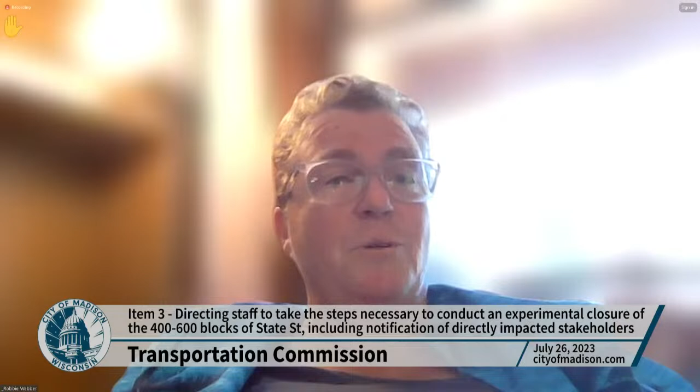We absolutely heard that when we had our conversations with GSBA representatives and the BID. Obviously different businesses have different perspectives, but one of the things we have to figure out is that balance between retail, service, entertainment businesses on the street, and the ability to get deliveries in. A lot of retail businesses are actually having deliveries go out for e-commerce.

If nobody else, I did have one question. One of the things I'd be interested in hearing about down the road is the concern expressed about how pedestrians, bicycles, skateboarders intermix in this pedestrian mall, and how would we ensure safety, particularly for those most vulnerable users, when people zoom by?

That is a great question, and it's one of the things we're really looking forward to digging into. One of the things in the back of my mind is the speed limit. That's certainly something. Bikes are also supposed to follow the posted speed limit, which is 15 right now, but we know certain cyclists exceed that on occasion.

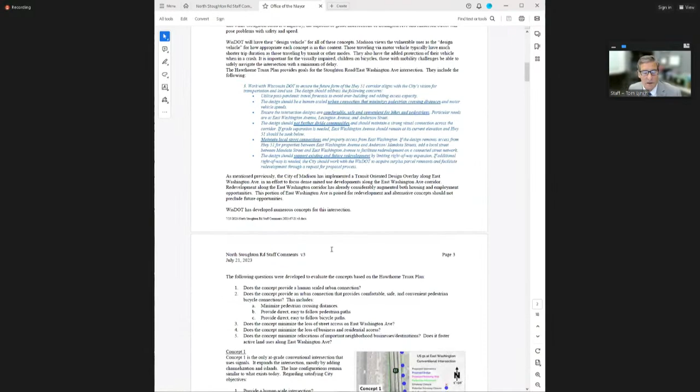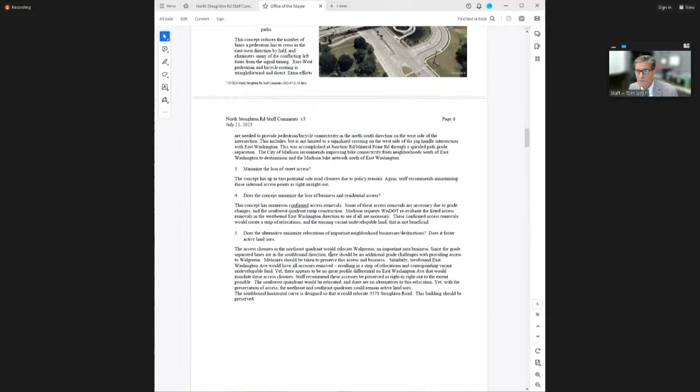So just to start, to know that it exists, I put this into Legistar. On Monday there were two updates that were relatively minor, didn't change the substance of it, but did change the wording of some of it. So you're welcome to pull this memo right off of Legistar -- this is the memo we will be transmitting to the DOT with your comments.

To discuss it, I put a lot of the graphics into a PowerPoint because visually it's easier, and that's what I'll talk from. North Stoughton Road study: Wisconsin DOT is preparing an environmental document, probably to be released spring or summer of 2024. This says the preferred alternative in the fall of 24, and that's not quite true.

I'm going to say that's screened alternatives in the fall of 23. It will go before the Transportation Projects Commission, that's a state commission for funding, in the fall of 24. They would like to narrow alternatives for meetings they're planning in September and October, and they're collecting comments.

For Madison, we have several key interests. We are interested in the intersections north of East Washington Avenue. The East Washington Avenue Stoughton Road intersection is of substantial concern to us. The Lexington commercial intersection also is key to us. For those not as familiar with the east side, that's the intersection that goes into the Walmart area. And then pedestrian bicycling.

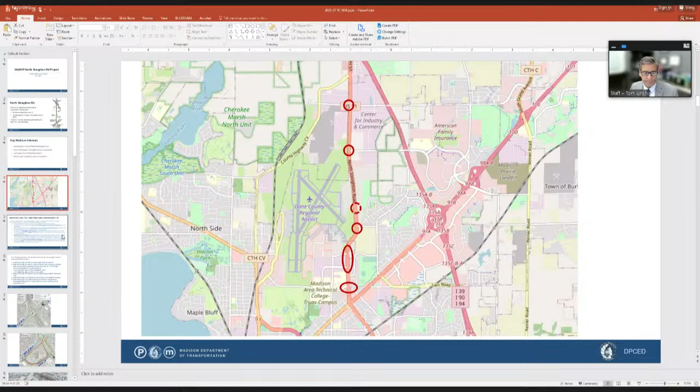Something perhaps bigger is the East Washington Stoughton Road intersection. So that intersection is right here. Recently, the Planning Division finished the Hawthorne Truax plan, and they have quite a few recommendations from that plan regarding this intersection. I highlighted a series of them.

The design should be a human-scaled urban connection that minimizes pedestrian crossing distances. The intersection should be comfortable, safe, and convenient for bikes and pedestrians. The design should not further divide communities. We'd like to maintain local street connections to the extent possible. And the design should support existing and future redevelopment. So those are key considerations.

I think East Washington Avenue is very important to us because the city of Madison just put in a transit-oriented development overlay. So on East Washington Avenue, we are asking for it to be more dense, more oriented towards walking and transit so we can provide more amenities along there. Our solution to transportation problems is to put our amenities and our people near transit where they can take buses. So it's really important that the urban character of East Washington remain.

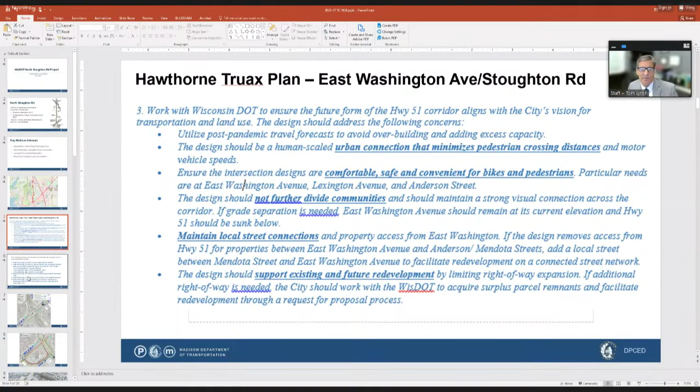We developed a series of screening questions, and this is in the memo. Does the concept provide a human-scaled urban connection? Does it provide comfortable, safe, and convenient pedestrian and bicycle connections? This includes minimizing crossing distances, providing direct, easy to follow pedestrian paths, and direct, easy to follow bicycle paths. Does the concept minimize the loss of street access on East Washington Avenue? Does it minimize the loss of business and residential access? And how does it affect businesses, both existing and future, through relocations or enhancements?

So I believe I just want to check, Alder Martinez Rutherford, this is not quite in your district, is it? Is this intersection in your district, or is it in Alder Field's district? I think Alder Field is on too, Tom. Oh really? Okay, yep, that'd be me on one side. Okay good, so this is good. I believe it's Alder Latimer Burris on the other, so we should try and get with her as well. But I'm glad that you're here, and I'm glad Alder Field is here.

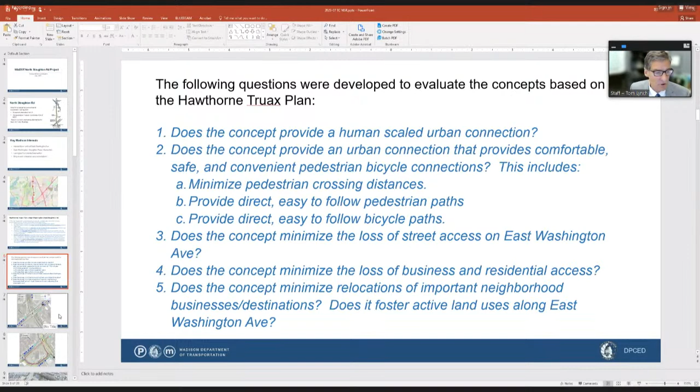So the first one is just a traditional signalized intersection. It looks like there's a lot of lanes here, but when you count it up, it's roughly about the same number of lanes on the approaches. Some approaches have one more lane, and some have one fewer lane. The islands could maybe be changed to reduce crossing distances, but this is an at-grade intersection.

This intersection actually becomes pretty feasible if, for instance, the DOT were to implement some of those I-94 interchange options at the 151 interchange. If you remember from our last meeting, several of the alternatives took a fair amount of traffic away from this intersection. If alternative 3, 4, or 5 were implemented, it would take quite a bit of traffic out of this intersection, and that at-grade intersection would be fully appropriate.

This is a very large intersection, but if you look at the bike routing, it's pretty traditional. Bikes would go straight east-west on bicycle connections. We probably would ask that an all ages and abilities type of facility could be provided. If you're trying to cross this as a pedestrian, they do have to use islands, but it's a little bit more straightforward.

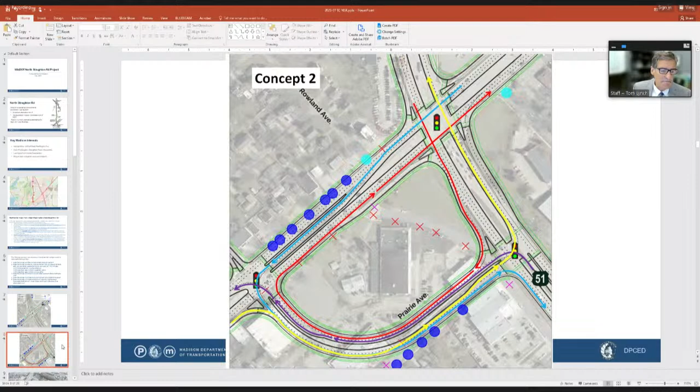This is an example of one, in North Carolina. Within my memo, I put a couple of links to locations so you could view examples of them. I think the links work in the Adobe Acrobat file. So that's something, but this is one. And here you can see, typically in a quadrant intersection, you can develop the interior. It's just that the left turns are relocated.

So those are the only two at-grade solutions being considered by the Wisconsin DOT. All the others involve some type of grade separation. So automatically, whenever you have a grade separation or a bridge, you're kind of changing the scale of the improvement. Something has to go up, driveways have to be removed. So it just changes the scale of it. It doesn't necessarily mean that's bad, but it just is what it is.

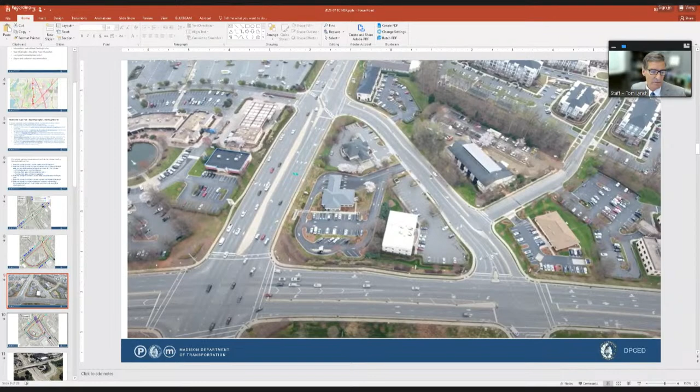Their third alternative is either called a partial jug handle or an echelon interchange. This is where, let's say, very much like the quadrant intersection, if I was going southbound and I wanted to go eastbound on East Washington, I would go southbound, take a right, and then take another right. Notice that in this particular intersection, I go over East Washington. We have one of these in the city.

It's over on Junction Road, and it's almost the exact same design. So here you can see what it looks like, and if you live on the west side or you care to drive to the west side, you can experience this. So at first glance, it does seem like it's a rather large improvement, and so that's probably why initially staff were a little bit cautious about this, thinking, do we want something this big?

But when you start looking at some of the criteria we're looking at, the east-west pedestrian movements, because the southbound traffic is grade separated, only have to cross 2 lanes right here rather than 7 or 8 lanes. Similarly, on this side, the east-west movements only have to cross 2 lanes and then another 2 lanes.

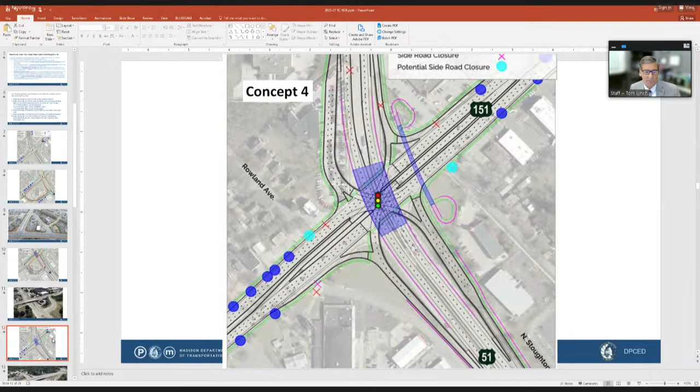The fourth concept they're considering is a single point interchange, partially because staff sometimes gave an indication that perhaps this would be better than a tight diamond. However, there are some concerns with this. We do have a single point interchange in Madison. Let me get it. It's right here.

It's very efficient for traffic. Instead of having two intersections, there's one intersection for motor vehicles. However, it's very difficult for pedestrians.

So I'll go to here. A pedestrian that's going east-west on East Washington has to cross a slip lane, cross another lane, cross another set of lanes, right? That's the good direction. In the harder direction, which typically is this right here, it almost always has to have a grade separated crossing, because there is always turning movements going on, and so there's never really a gap in the traffic where a pedestrian can cross.

So for the Verona Road single point interchange, they put in a tunnel. It's a rather long tunnel, but that's the only way a pedestrian that's over here can go here. They would not be able to do it here. There isn't a tunnel on the north side, and similarly on their proposal, they don't have a tunnel or an overpass on the west side.

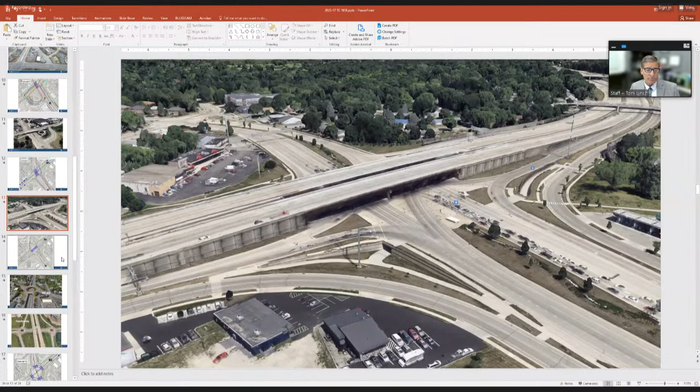So moving on, the DOT did get creative, for their part. They looked at a lot of different things. This is one, and you look at this and go, oh, well, isn't that interesting? That's kind of an interesting design.

The difference with this is that functionally, this is an example of one of these right here, except that instead of the roundabout being below, the roundabout is above. But this is an example of one. I think I put a link to this in the memo. However, functionally, this ends up being just a diamond interchange with roundabout terminals. It's just how do you want the roundabout terminals to work, but functionally it ends up being just like this. This is actually the Highway N interchange in Cottage Grove. That's essentially what's happening with this one.

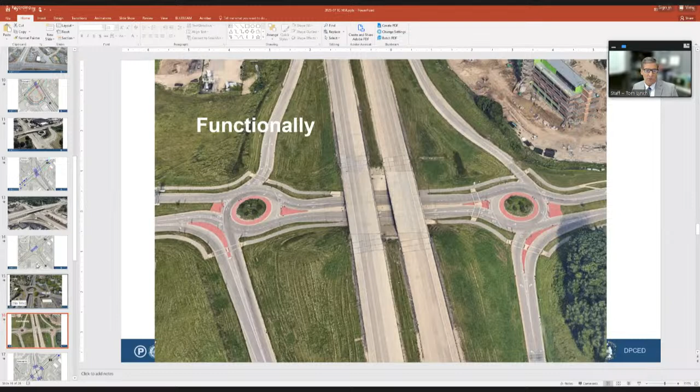The problem is that instead of the dominant direction being the north-south direction on Stoughton Road, the dominant or free-flowing direction is on East Washington, which is maybe not what we would want.

Because these are ramps right here, all of these driveways, you just can't have driveways on ramps. You just don't put driveways on freeway ramps. So these become relocations, but not only do they become relocations, these properties, we're not able to redevelop because they don't have access. If you don't have a driveway, you don't have access. So then this becomes a vacant piece of land on a street that we feel is pretty important for us as far as filling up with people and businesses and stuff.

One other factor is that all of the Stoughton Road traffic, which in this area seems to have 60,000 vehicles per day according to the site I was looking at, pedestrians would have to cross.

Right now, pedestrians have to cross that 60,000 vehicles per day, but they have a signal that helps them cross. It's not comfortable, but they have a signal. With a roundabout, they'd have to find gaps, and that would be difficult in the east-west direction. It's easy to find gaps in the north-south direction because it's just turning movements, but the east-west direction is where a pedestrian would have to cross, and that's 60,000 vehicles. So that's a lot, and we're not really recommending this one.

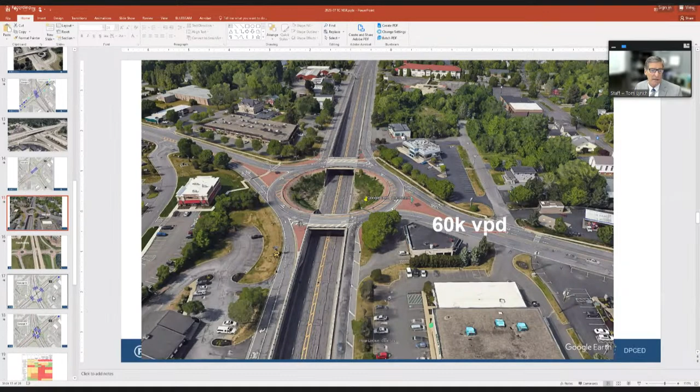But that being said, the DOT came up with some creative designs, and they're worth looking at. If we look, concepts 6 and concept 7 are essentially the same, they're just treating things differently. So I think I'll describe concept 7 first, and then go back to concept 6.

We could not find links to concept 6 or 7 because we could not find other examples in the United States where this exists. What this does is it takes turning movements off both the north-southbound and east-westbound streets and brings them up to a couplet. These are little signals, and they'd be snappy signals, like 40-second cycles. You come up, get a green, make your turning movement. I'd take this ramp, get a green, take my turning movement, go that way. Similarly, come up, get a green, take my left. So this would be very snappy.

For pedestrians, it would actually be kind of good. These are just traditional intersections for a pedestrian. They would actually have to cross probably only a quarter or less of the traffic volume, because they're only crossing turning movement volume, not the through movement volume. So it's really kind of innovative.

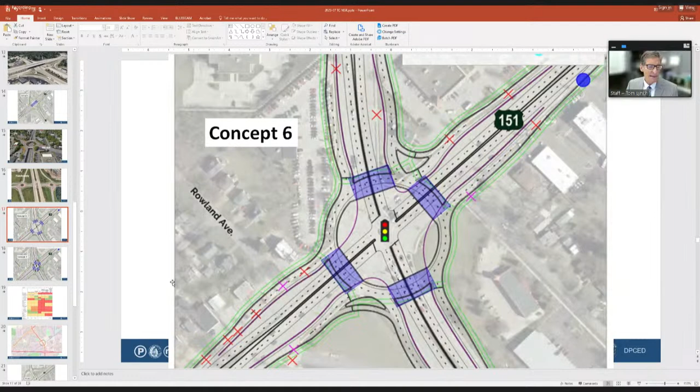So on that, our staff memo recommends maybe moving forward with concepts 1, 2, and 3. If you look at the way we scored them, these may be a little bit subjective. Concept 7 is kind of an intriguing concept, but it's non-traditional, and I don't know if we could find another example. So I'm actually, if you don't mind, I wouldn't mind pausing.

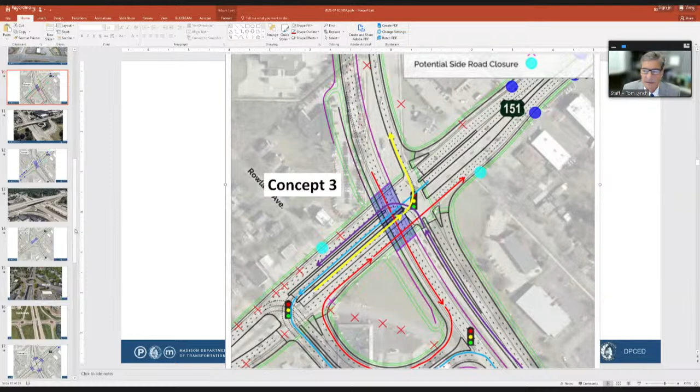Thank you so much. So I wanted to echo some of the concepts, values mentioned by the last 2 speakers, and thank Tom for putting together this chart comparison of some of the alternatives per these goals of the city. I agree with the majority of these. None of the alternatives look quite perfect. I was at the local elected officials meeting where these were previewed a couple of weeks ago, and my biggest piece of feedback globally for each of these was that we do need to prioritize pedestrian crossings in this area to avoid further disconnecting some of these neighborhoods from each other. So some of the grade separated intersections or interchanges are the ones that I'm very much least interested in seeing happen.

And so there are 2 kind of uses or types of crossings that I want to talk about that I'm most interested in making sure we're not requiring people to go up uncomfortable spiral ramps over the highway. So my constituents are the Mayfair Park neighborhood, which is in the southeast quadrant of this intersection, who will soon benefit from a major city investment in the northeast quadrant of this intersection, the Reindahl Park Imagination Center. So they'll be crossing quite a bit there to get over to the new library and culture center and the parks facility that's going to go up at that site. And they're very excited about it, the neighborhood's been looking forward to it for a few years, and their ability to get there will be contingent on how readily pedestrians and bikes can cross East Washington at this location.

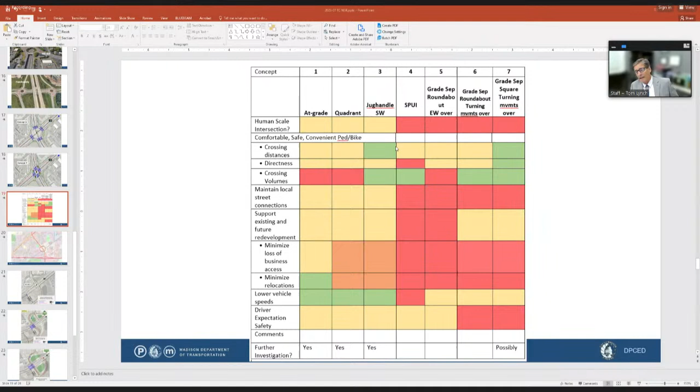We're seeing on the north side, both the northwest and northeast quadrants have land uses, and people need to be able to get between the northeast and northwest quadrants now. There were comments since the Ped Bike workshop on how that could be facilitated, because there is housing in the northwest quadrant, and they do need...

Walgreens, that serves a function. People need to get to that, right? Klein's just made a huge investment in their facility. It's kind of an east side destination, right?

It's okay for people to be able to get to where they need to get, without having to cross 8 lanes. So I did try in the memo to state that our design vehicle was a vulnerable user, not the WB62, right? But it's more the...

Would you feel comfortable having your 10-year-old or 11-year-old on a bike go to Walgreens? And if you don't feel comfortable, then we're not comfortable with that alternative. Yeah, for sure. Alder Martinez Rutherford, go ahead.

Yeah, I just wanted to mention that, knowing this area pretty well since I drive through there all the time, both northeast and northwest have a concentration of lower income people, and I want to make sure that they're served in the best way possible and not further impacted by what happens here.

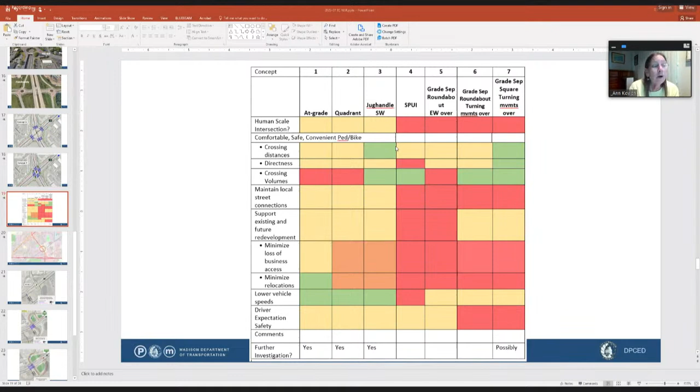Great. Thank you. Okay. I know we have more to go on this item. Anybody have anything else on East Washington before Tom moves on? Okay, great discussion. Go ahead, Tom.

Yeah, I'm going to be quicker on this. I think it's a little bit more straightforward. This is interesting. This is an intersection right now that was at one point a grade separation, and now they're looking at making an intersection. This is Lexington and Commercial, and this is the Walmart.

There's some city buildings back here as well as a neighborhood. In fact, I lived back here when I first came to Madison.

Things of concern or interest here is that this is the line that if we were to get passenger rail service, this would be the line where we get it. Then also, the bicycle and pedestrian connections here are very poor, and yet Walmart is a destination for lots of different types of people, right?

This is where people get their stuff. In fact, if you drive by Walmart or ride by it, the bus stops always have someone at the bus stop, almost always. It just always does.

One other thing that has been mentioned is that here's an area of housing right here that doesn't really have access to Walmart, right? On the east side of Stoughton Road, there's not a north-south connectivity for pedestrians or cyclists. You have to get it pretty much in a car. On the west side, there is, with that frontage service road, but on the east side, there's not.

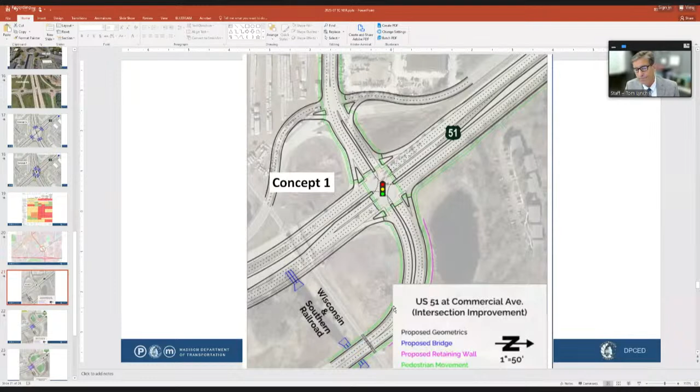Concept two has a jug handle. The way it works is it has right-in, right-out on Stoughton Road. So let's say if I'm traveling south on Stoughton Road and I want to go to Walmart, I just take a right turn off, go around underneath Stoughton Road.

And then I'm on the street that gets me to Walmart. So this seems indirect, but we do it already kind of now in the city. Like if you think about the Verona Road interchange, they have a Verona Road frontage road to get to Home Depot, and then the tool shop, Harbor Freight. So this is a typical type of jug handle.

This does not have any signals on Stoughton Road. This does make it better for a cyclist or pedestrian crossing Stoughton Road. All of a sudden they're just on this little local road, right? They don't have to cross 8 lanes of traffic on Stoughton Road like they currently do.

They're more on a crossing that would be comparable maybe to the way Cottage Grove Road crosses Stoughton Road. If you've ever been on a bike on Cottage Grove Road, the way it crosses Stoughton Road, this is how that would feel.

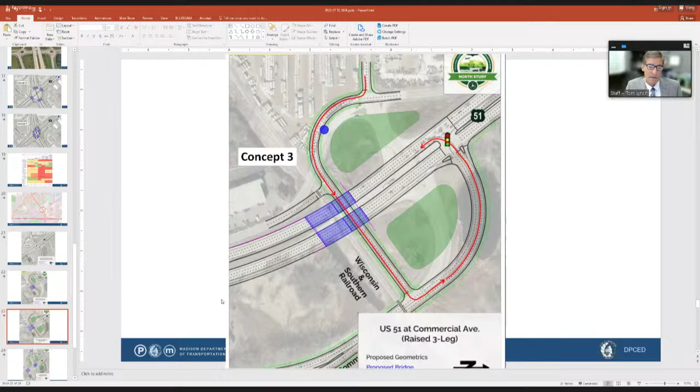We're more hesitant about concept 4. Concept 4 is a full partial cloverleaf interchange. We think the interchange and kind of the free-flowing nature of the ramps will lead to probably higher speeds.

And then those higher speeds, they'll get to be higher speeds up until a signal that's just right here. The signal is relatively close, I think it's a third of a mile. So you get on a freeway interchange just to have to stop this way. Similarly, let's say if I'm at Walmart and I want to go to East Washington, I get on this freeway interchange just to come to a stoplight, at Stoughton Road or at East Washington.

We have a similar situation with the interchange at Aberg. We have an intersection directly north of Aberg, and cars are flying up that interchange ramp, but then we have a school crossing right there at the end of the interchange ramp. It's very difficult for us to keep speeds in the appropriate range. We do have an RRFB there. It's a school crossing. It's not good.

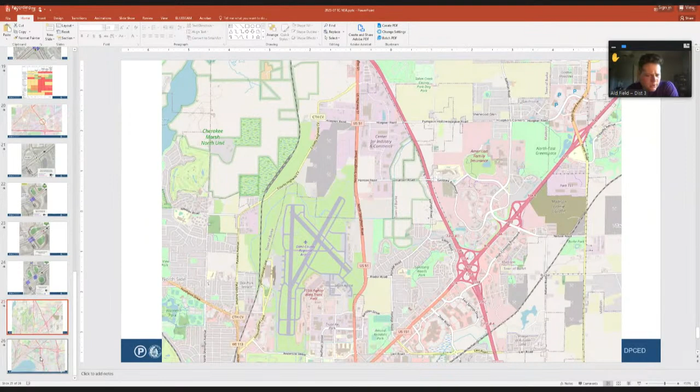Alder Field, go ahead. Thank you very much, I'll be brief. In this area, folks in the Mayfair neighborhood and further east are also pretty interested in being able to cross Stoughton Road here. So whatever configuration of Lexington ends up being chosen, we'd really like to see the ability or enhanced ability for pedestrian and bike crossing toward downtown. Thank you.

Okay, other comments or questions? Had a lot of great feedback on this tonight. Bill, go ahead. Thanks, Sam.

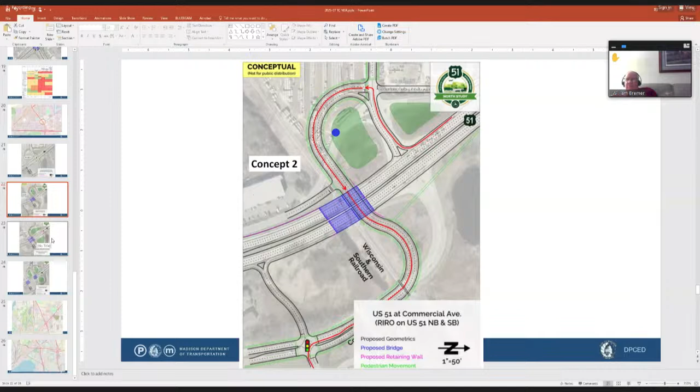Yeah, that's 4. Yeah, I don't like that one, it looks just out of place.

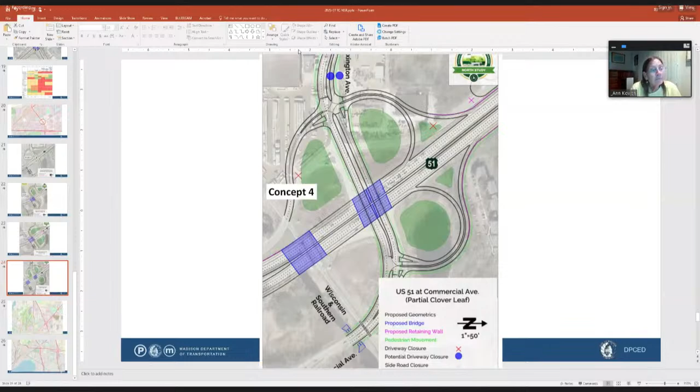Other comments or questions for Tom? Okay, you have what you need then, Tom? Yeah, I do. And first, I've taken up a lot of airspace — we devoted an hour of this meeting or more to this, but I think these are very important.

WisDOT's moving quickly on these 2 studies, I think it's really important for us, so I thank you for your time. I think we have to be proactive in our engagement with WisDOT, and this helps us to do that. Thank you. Denise, I know you had to join us late because you had another commitment — did you have any other comments before we move off of Stoughton Road?

I really feel like Chris spoke to my always overarching concern around building for all users. I am curious about what WisDOT's engagement plan is going to look like. I serve on a couple of WisDOT things, like the current active transportation 2050 plan, and have been pleased with the increase in WisDOT engagement to diverse communities. So I just want to put a strong plug in here that anything WisDOT is doing that we can support and encourage, making sure the voices of folks who are often not included in these things — especially as it gets away from the city and into the state — I think extra effort is going to need to go into outreach, and I really want to encourage that to happen.

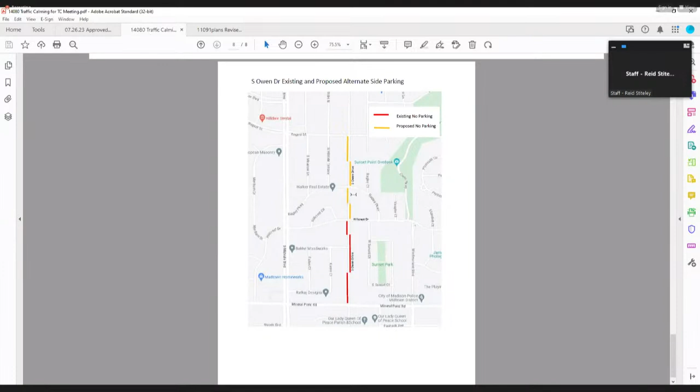So with that general input, engineering did some speed studies in the area and looked at what the traffic was doing, and we also did the survey and garnered general interest from the project area. I have those results here tonight. From the speed study data - just before I get into that, so everyone's on the same page, here's a little map of where we're at. The project will be the reconstruction project between Hillcrest Drive here on South Owen Drive up to Regent Street. With this project, we're looking to install the traffic calming devices on the second block, which would be the block between Bagley and Regent Street.

The responses from the residential reconstruction survey - originally we had sent out mailers to the area. Of the 37 mailers, we got 16 responses back, so just under 50% response rate, which we think was pretty good. There were multiple questions on the survey, but in relation to the traffic calming devices, question 9 asked if they wanted it, and question 10 asked what type.

The majority of applicants who responded said yes, they were interested in having traffic calming. The majority of the other responses favored some combination of traffic calming, speed humps and traffic median circles, with slightly more people favoring only the traffic median circle, and then speed humps.

In 2015, there was the reconstruction of Hillcrest Drive. Let me bring up my map here for everyone. Just south of the upcoming project limits was this reconstruction of Hillcrest. In that project, they installed a traffic median circle. Actually, you can see it right here.

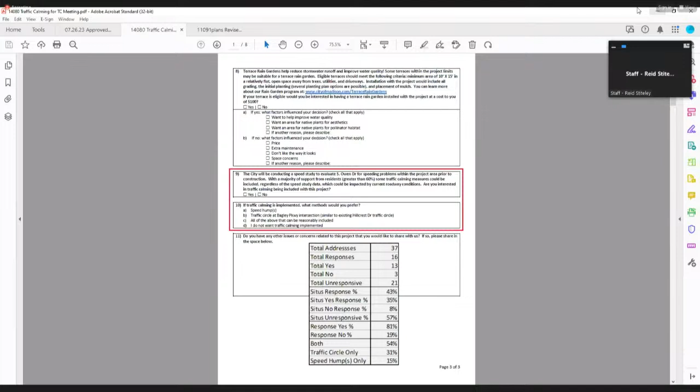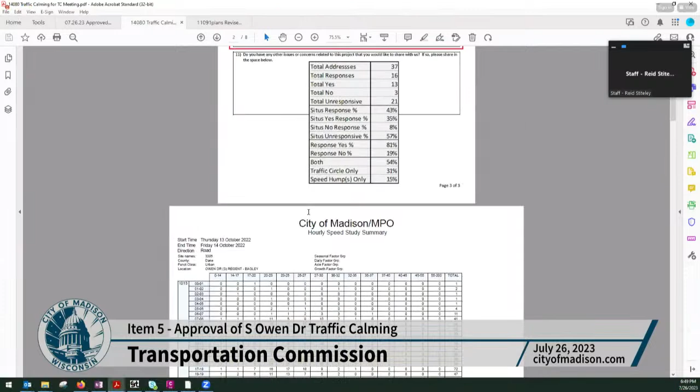I'm not seeing it. Is anybody seeing it? Can you see it now? We're still seeing the survey. Okay, let's see here. I think it said it's paused. One second, it hasn't moved. I'm gonna try one more time. Reid, this is Andy, you might be sharing the individual item and not the screen. Share the desktop instead of the application. Screen 2, let's see if this works better. How about now, can you see a moving screen? It is moving now, yes. Okay, my apologies about that.

So I guess this was the survey that we sent out, or one of the pages from the survey that had the questions on it. The area that we're looking at here is between Hillcrest Drive and Regent Street on South Owen Drive. Yeah, we did see that.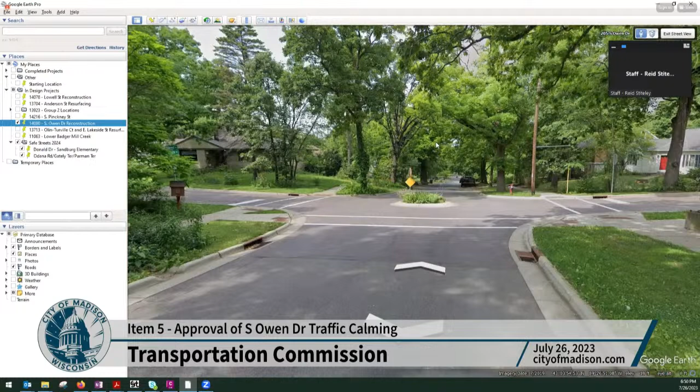In 2015, Hillcrest Drive was reconstructed to install this median island in the street at the intersection. That's kind of what we're proposing to mimic with the next intersection up, at Owen and Bagley. So just some context there of what's already there and what's working right now.

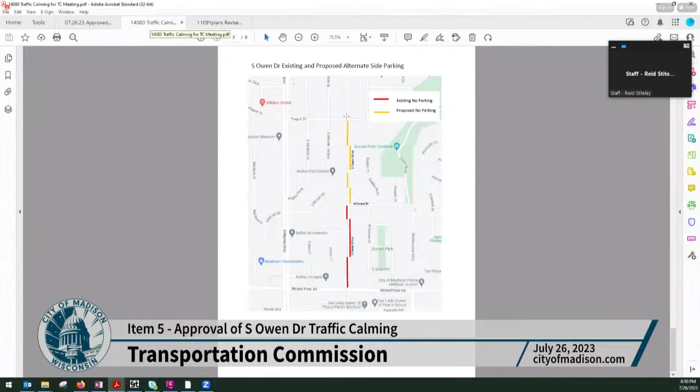In addition to that, we did some traffic studies for the area. The first study, or for both studies, one was done in October 2022, one was done more recently in July 2023. The results didn't really show a high level of speeding in the area. The 85th percentile speed was in the 25 to 27 miles per hour range. There was, I believe, between 5 to 7% of vehicles observed between these studies that were seen going above 30 miles per hour.

So there's kind of a conflict between what the studies are showing for the data and what the community is asking for with traffic calming measures. That being said, because we are reconstructing, it's the best time now, since we'll be more or less obliterating the street and rebuilding everything, to be able to do it now and get these installed.

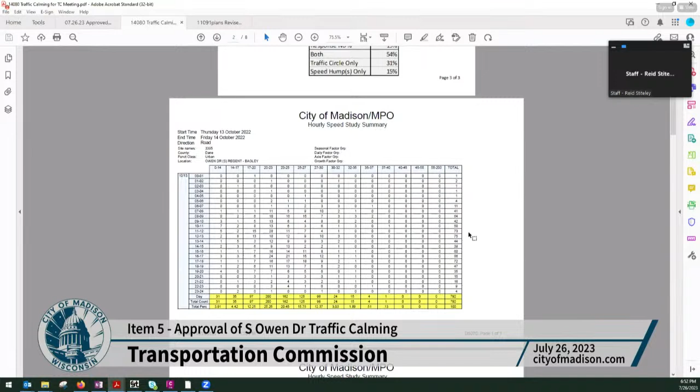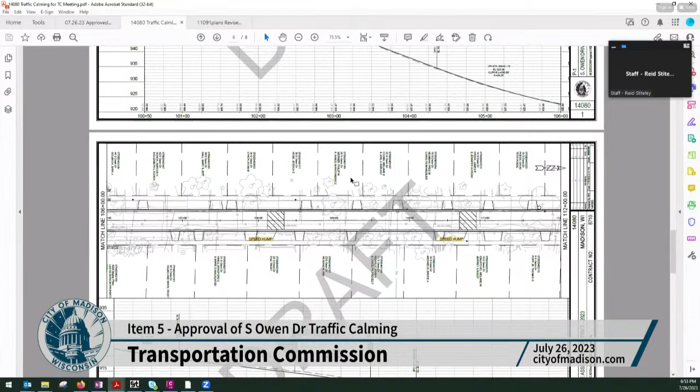With the outreach and response from the community that we had, we're still going forward with pursuing the addition of the speed humps and the circle for the area. I have them shown on the plan, some draft plan sheets here. The first segment of Owen between Hillcrest and Bagley is generally too steep for these installations. Typically we want the profile of the road to be less than 7%. This is a pretty steep section of Owen, it's around 9.5%.

So that's where we're left with placing the speed humps, on the section between Bagley and Regent. We generally have more gradual grades here, and the two that are proposed are offset by approximately 250 feet from the intersection to maintain slowed speeds as folks travel between the intersections of Regent and Bagley.

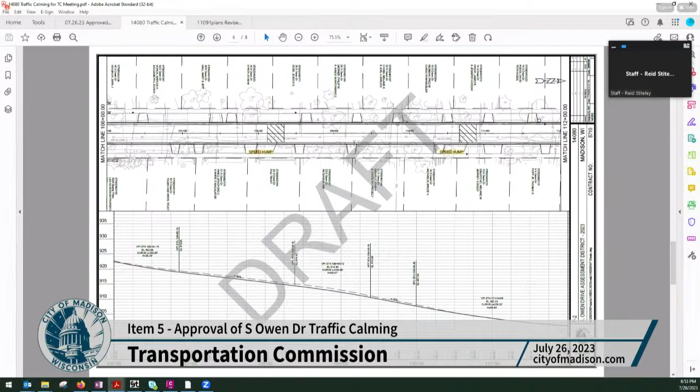The traffic circle is shown on this page. It's almost an exact copy of what we did recently at Hillcrest. It would not be a grass center though, it would just be a mountable terrace for turning movements for the area.

So that's pretty much what we're proposing with the project as far as traffic calming goes. One other thing to note, it's not shown on these pages, but we are going to be installing, with the reconstruction project, redoing the storm and sanitary. So the storm sewer inlets would be located on the high sides of the speed humps on both sides, to mitigate any ice damming and drainage issues from water collecting on that side. There will be drainage inlets installed with the project along the street for that surface water runoff. Okay, thanks Reid, comments or questions for Reid?

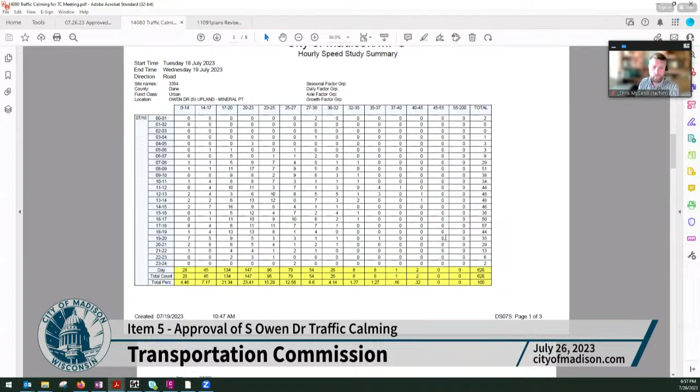Yep, perfect. But the speeds may increase with the better road - that was your other point, right, Tom? Right. We've always thought, if it's a really rough road - the pavement rating here is a 3, so it's in pretty bad shape - and then there's that hill, so we'd expect to probably get more complaints of speeding after the fact. So that's why we just include it with the project.

Okay, thanks, Tom. Reid, did you have any other comments before we move on? Thanks, Sam. Nope, that's great. Sorry for kind of rushing through that. The project will add curb and gutter to the streets.

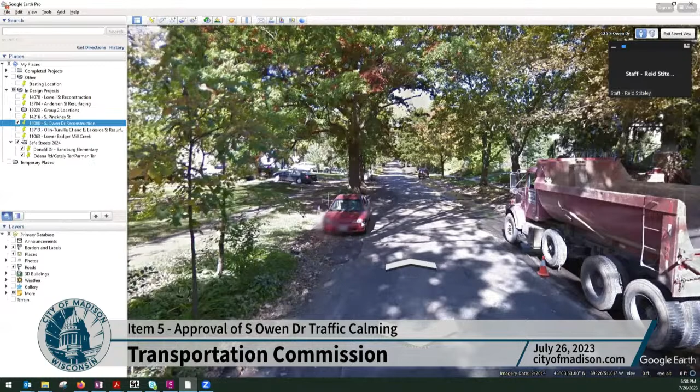With the existing street, you can see here the street width - there's a lot of folks that park on the existing terrace, and that won't be able to happen now with the reconstructed streets since we'll be adding curb and gutter. We're proposing staggered parking, alternate side parking, to match what was done on the previous section of South Owen Drive too. That's also part of the traffic mitigation and traffic calming strategy for the area, and to allow parking - so there will be parking too on the street. I just wanted to clarify that for folks.

Okay, thanks. Let's see, looks like people had hands popping up and down. We'll go with Darren.

Thanks, Anne. I was just trying to look at the section on my little screen. So just to clarify, because I think I can see them - are there sidewalks on this road? Yes, there are existing sidewalks, on both sides of South Owen Drive.

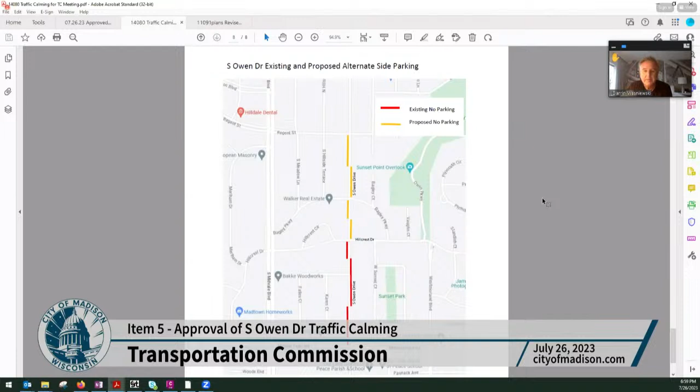And just had a question about the speed bumps, understanding that one section isn't really feasible to put it in because of the grade - would there really be anything, in your opinion, recognized or realized by just adding the speed humps to the second part of that street, as opposed to just on-street parking and then the circle in the intersection?

I would say there will definitely be an impact from the speed humps. Typically, from what I've seen, they can help maintain at least consistent speed, especially when they're spaced in the 250 to 500 foot intervals, so folks can't really speed up between them. They'll help maintain those slower, consistent speeds and prevent folks from ramping up in that area.

That being said, it's just like that section between Hillcrest and Regent Street, which is approximately 800 feet long. So like Tom said, it's kind of right in that gray area. We've heard from folks that they want them, and our speed study is only for 24 hours each. So it's kind of in that area, but in general, I think they would still provide some traffic calming benefit in that they can help dissuade speeding in that area, just because they'll be hitting those humps.

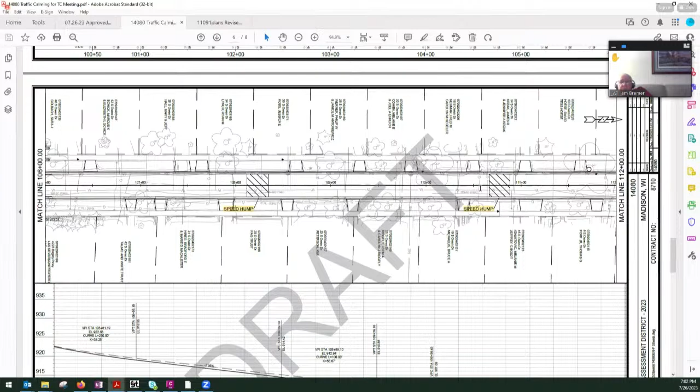One of the things I think, the plus of putting in the speed humps, is you get to do the drainage and do it correctly without having to worry. You can put the inlets where they should be if you're going to have speed humps. Many times when we put in speed humps, we don't have that luxury because we can't change the storm system, it's just too expensive. But in this particular case, I suspect that might be one of the reasons for the need of the project. So I think it's an opportunity to take advantage of that, put the inlets at the most desirable location for the traffic calming measures. And I really like the circle too.

Thanks. Thanks, Bill. Alder Figueroa Cole, go ahead. Thank you, my hand kept on going down. Yeah, I don't know why.

So yeah, I had exactly the same question as Chris had, like which program this was. So thank you for the feedback on that regard. I had to just put my two cents in here.

I mean, as much as I support this program, and you guys know I'm your number one cheerleader, things like this make my job very difficult. Everybody wants speed bumps in the city. Everybody. And the only way I can say no is that we have a process on the city for safe streets. We have to put the name on the list. We need to get evaluated for traffic. We're using data, I have this speech down on what this policy is. And sometimes I get Renee involved, and she again turns all that down and refocuses people on the policy. But then here we are in contradiction to the policy. This doesn't even make it to the top of the list for sidewalks. So it makes it very hard for me to say no to other people when they want theirs.

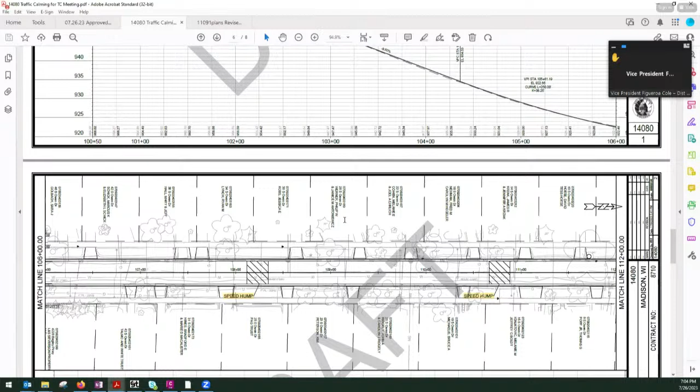So I understand the prediction that in the future these might be beneficial, but I really hope that the commission, along with their approval, has a good justification as to why we are expending money on one of the most expensive traffic calming methods, the speed bumps, so we can then justify that in future requests. That's how I feel about it. Like I'm here thinking.

So I really appreciate if this is approved, that there's something we can point back to in the future to justify this not following the rules we're using for the street calming policy that we put in place. And it cannot just be, oh, this is not done under that program, this is done under this other program. We're solving the same issue. So I will appreciate clarity on why we will do this here and not in other places.

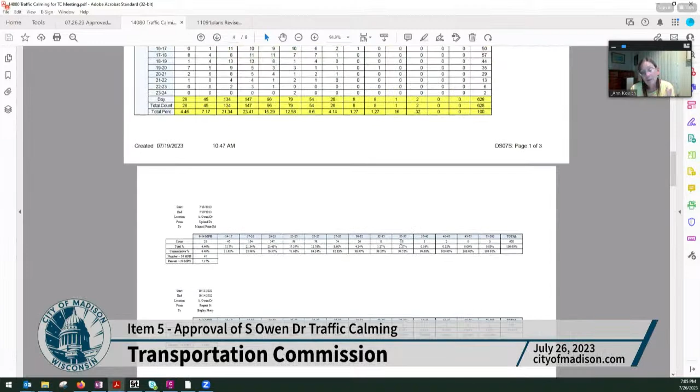Yeah, thank you, and that's a great question. I'm going to ask Tom Lynch and Tom Mohr to comment, because there are different programs. And Renee, if you want to hop in as well. When we have new streets going in, we've put in traffic calming along with those new streets because it may be paid for by the developer, as part of a new construction program, or where we have street reconstruction or street resurfacing. So they are different programs from Safe Streets Madison. Perhaps it's hard to explain because the criteria does appear different depending on which program we're looking at. Now Tom and Renee, am I on the right track with that?

Right, yeah, I would say that the big difference is that we're making a pretty big change to the street with the full reconstruction. So we're kind of anticipating things and trying to make the best street possible, since we're focusing on that street. It's kind of like the Lake Mendota Drive.

Speed humps aren't the only traffic calming device or item that we add to streets during reconstructions. We narrow streets, add bump outs, change crossings, add sidewalks. So we're looking at the entire street when we do the reconstruction, trying to take everything into account. It would be difficult to say we're going to reconstruct the street, but traffic calming is off the table unless it ranks high enough in the Safe Streets program.

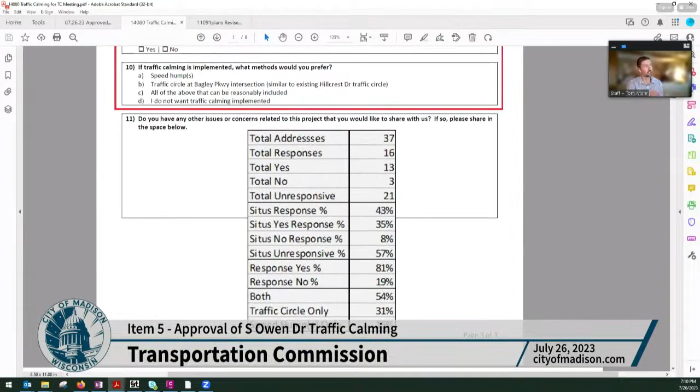So it's kind of a holdover from the neighborhood traffic management program, where it was all based on resident support. So that's the question here, right? Does this fit in with how we're doing Safe Streets Madison? I don't think there's a perfect answer to that, but I think that is a question. In the Safe Streets Madison report, we do talk about not addressing issues until reconstruction comes up, because it makes economic sense to do that as well.

So is that all you had then, Alder? Alder Figueroa Cole, is that all you had then? Sorry, yeah, that's all I got. Thank you. Okay, thanks, Denise, go ahead.

Yeah, thanks, Ann. I want to support what Alder Figueroa Cole just shared. I'm in this neighborhood nearly every weekend, and I'm really conflicted about this situation. I do witness cars flying down, they build up speed, they clip along. So I can see the benefit of the traffic calming measures, because by the time they get to the bottom of the hill at Bagley, they've got some good tailwind behind them. So it makes sense to me because of their street reconstruction.

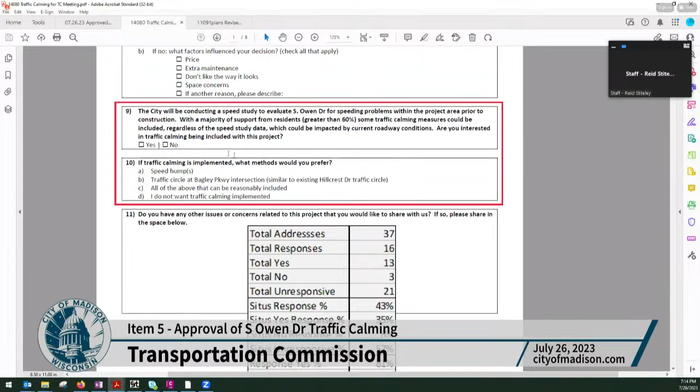Yes, so it's a combined approach here, and that was actually something we proposed, a question of whether they supported speed humps, a traffic median circle, or both. I could see that being a potential alternative to this, just kind of mimicking what was done in the past, not necessarily a halfway point for the project, but at the intersection of Bagley, to have some kind of calming measure there. So I guess we're open to that discussion as well.

So my question back to you, Chris, and to Denise and others is: are you, maybe we can let Darren talk and then come back. Are you supportive of the traffic circle, just not the speed hump? Yeah, I guess. Well, I still have the floor. Yeah, yes, the traffic circle. Okay, alright, Darren, go ahead. So Chris had kind of addressed some of what I was going to say.

But my question was, how wide is the street? I'm not able to see it on my little screen as I'm traveling. So, the reconstructed street will be 28 feet face to face from curb to curb, which would allow for two 10-foot travel lanes, and there would be 8-foot parking spots for the alternate side parking against the curb.

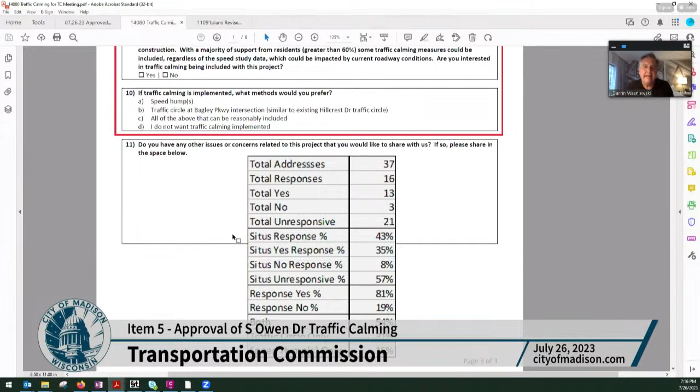I'm just, and then the last question I have on the survey response: is that the percentage of respondents, or is that the total? When it says 54% want both, is that 16 who responded? Yes, this is of who responded. Sorry, the final 3 rows here are of the 16 people that responded, and the 13 that said yes. This is the breakdown of the 13 people and how they voted. So I tried to kind of cascade it.

So that really puts it in context for me. I mean, it's 54% of 13, so what's that, a little bit more than 6.5 people said both, and a little over 3 people said they want speed humps. Out of 37 addresses, it doesn't seem like a really clear direction to me. I'd be fine with the traffic circle because I think there's one already there. I have one on my street. I do realize what they do to slow down traffic, but definitely not in support of speed humps.

Yeah. And Rita and Tom, did you have any response to Darrin's question? Why are we building the street so that it might be faster? Yeah, I mean, I think there is some reality to it.

I guess I heard the pavement quality is at a 3. That is a pretty drastic change, but I think 28 feet is well within our neighborhood yield street, neighborhood street kind of configuration. So I think we're figuring out the balance of traffic calming to narrowing as we move forward, and we're in this interim period where some projects were before Complete and Green Streets was approved. Now we're having some that are, but 28 feet is definitely typical.

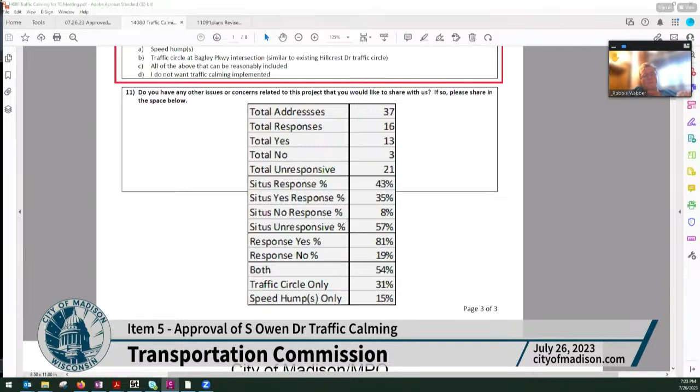just the neighbors' preferences when we do these reconstructions. I mean, we were trying to get away from that in the first place. And so we need to look at how does this street function, how does it fit into the Complete and Green Streets plan, what's the appropriate treatment. So I think the traffic circles are probably the appropriate feature, but in case people aren't aware, it is actually a fairly important bike connection as well.

Mm-hmm, thanks Robbie. Other comments or discussion? Very excellent discussion, yes, thank you very much, about a topic that has come and gone. I am going to assume a unanimous consent vote unless anybody wishes to vote no or abstain. Bill? I'm going to abstain. Okay, anybody else?

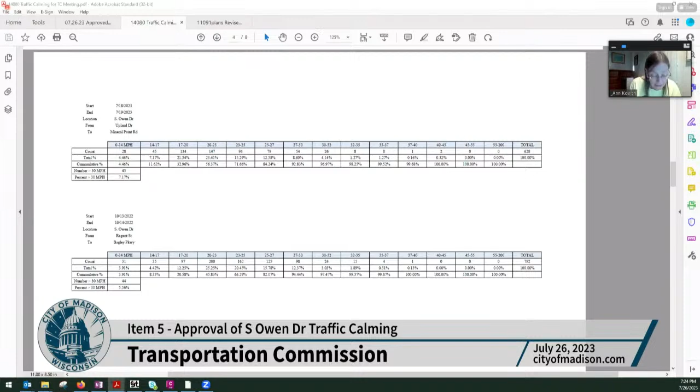Yeah, it's a good conversation for us to have because we're going to be having another Safe Streets Madison conversation coming up probably in September. Okay, thanks, Reed and Tom and Renee and everybody.

Next we have item 6, which is Hawthorne Court reconstruction, a different reconstruction project. Fadi, is that you? That is me. Okay, hi, good evening. I am Fadi Musa with City Engineering. I'll be presenting tonight the proposed layout and cross-section for the Hawthorne Court reconstruction.

I am going to share my screen to present the displays. Can anybody confirm that you're seeing a PDF? We can see it, yes we can. Perfect. Okay, so I'll be presenting three displays tonight.

So the first one that I'm currently showing is a plan view. Hang on, excuse me one second. Darrin, you have your hand up. Yeah, just wondering if you can make this full screen and blow it up a little bit. It's a big page. I'm going to zoom in and pan over it. Does that work better, Darrin?

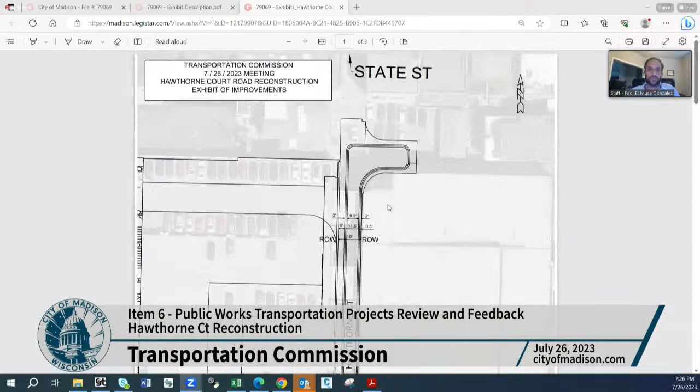Perfect. Okay, so on the first exhibit I'm presenting, I'm showing the limits of Hawthorne Court and a layout on plan view of the proposed improvements. For project limits, Hawthorne Court will be reconstructed from University Avenue on the south side to just short of State Street on the north side.

For background, and I don't know if the Transportation Commission is familiar, but the State Street campus garage will be reconstructed next year. The folks who were on the former Transportation Commission have heard many times about the State Street campus garage redevelopment, but there are some who are new. Understood, okay, so I'm going to give a quick background on this.

So the current parking facility to the west of Hawthorne Court, adjacent to it, between Hawthorne Court and Lake Street, will be reconstructed and will become a multi-use building. It's going to have a public parking facility, housing, the intercity bus terminal, and I think I'm missing something else, but anyway, it's going to be reconstructed over the following three years. Construction is planned to start in 2024 and be completed in 2026.

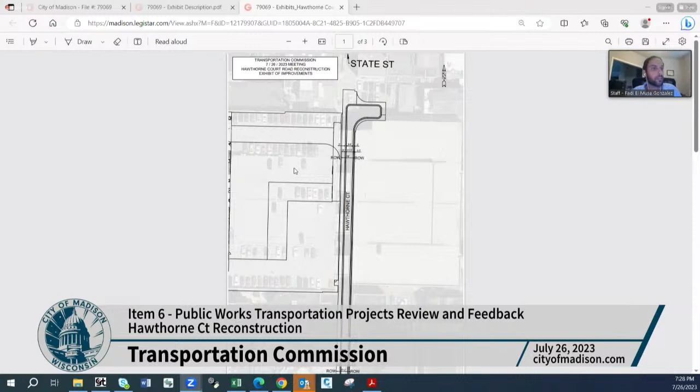Hawthorne Court itself is being presented tonight for review and feedback, but the plan is to reconstruct Hawthorne in 2026. The reason we are presenting this tonight is that the right-of-way here is narrow, and we're trying to distribute the facilities for vehicular traffic and pedestrians as best as possible. The design of Hawthorne Court, if not done at this time, might not work with the design of the building. It's very important that we nail down the cross-section and vertical profile of Hawthorne Court to ensure that when the building is up and operating, everything works as efficiently as possible.

Okay, zooming into the dimensions. So we're proposing to have a 5-foot sidewalk and an 11.5-foot wide road, measured from face of curb to face of curb. The sidewalk is going to be on the west side, and to the east of the curb there's going to be a short section of pavement, which is just basically going to fill from the back of the curb to the right of way.

On the next step, I'll leave the questions for later. If anybody has any questions or doubts, please let me know. Sure, if anybody has a question as we go forward, just raise your hand and we'll take them as we go. I'm assuming we don't have any other registrants, is that correct, Aiden? Yep, that's right.

Okay, thanks. On the second exhibit, I'm also presenting a plan view of Hawthorne Court, of the finished product, but now I'm presenting the traffic flows post-construction of the building and also post-construction of Hawthorne Court. Hawthorne Court is going to be used as the travel way for the buses using the bus terminal of the new building. Hawthorne is going to be one way only. Currently it's two-way, but after construction, the plan is to make it one way only, northbound, with access off of University Avenue.

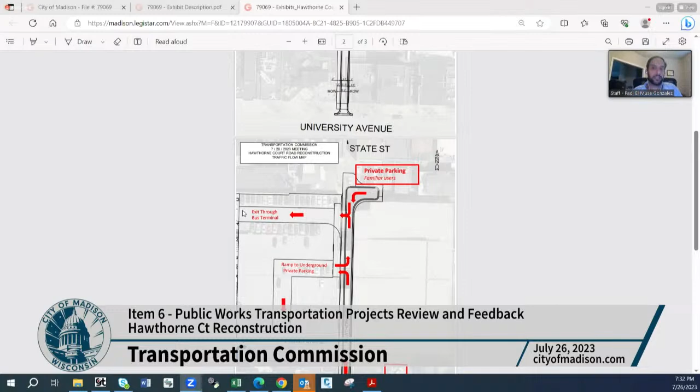For the residents that have the driveway on the northeast quadrant, same deal. They're going to drive northbound on Hawthorne Court from University Avenue, and to leave the property, they'll drive southbound up to a point where they reach the bus terminal, and they will not be allowed to drive southbound anymore. So they'll have to make a right turn onto the bus terminal and take an exit into Lake Street. This is the proposed layout of the traffic flows post-construction.

Finally, the third exhibit is the proposed cross-section for Hawthorne. Going from west to east, there's going to be a proposed 5-foot sidewalk. It says 6 feet because it's measured from the right-of-way to the face of curb, but the sidewalk actually is going to be 5 feet. The curb head is going to be 1 foot wide.

The width of the pavement, like I stated on the first exhibit, is going to be 11.5 feet wide, and on the east side it's going to be 0.5 foot wide. The section behind the back of the curb is going to be concrete, also filling the gap between the back of the curb and the right of way. I think that's pretty much it. I'll be open for questions.

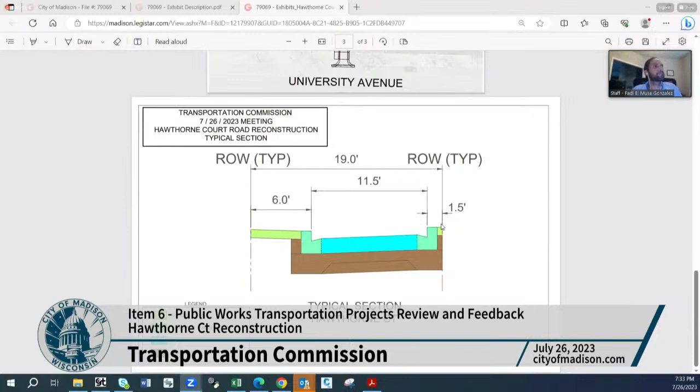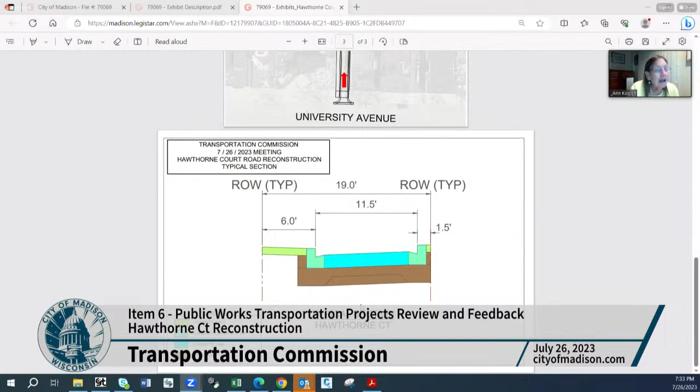I know there's been a lot of discussion with the bus companies, and Tom Lynch, I think you're still here. A lot of conversation about how this might work, correct, Fadi? So we're reflecting what was decided with regard to how vehicles were going to flow through the facility, correct? Correct. That has been discussed many times and in many ways.

We would like to nail down this geometry in this cross section. One key component I did not mention because it's not traffic related: Hawthorne Court has an enclosed depression mid-block, so both ends at State Street and University Avenue are higher. So every drop of water that gets into Hawthorne Court doesn't have anywhere to go except via storm sewer. Once this geometry is approved by the city committees, we want to design it in a way that we know the building itself is going to function and operate efficiently. If any changes were to happen after the building is designed, we'd be restricting ourselves and might not have the best product when finished.

And you're just looking for review and feedback from us tonight, is that correct? Correct. Okay, so comments and questions for Fadi. Chris, go ahead. Thank you.

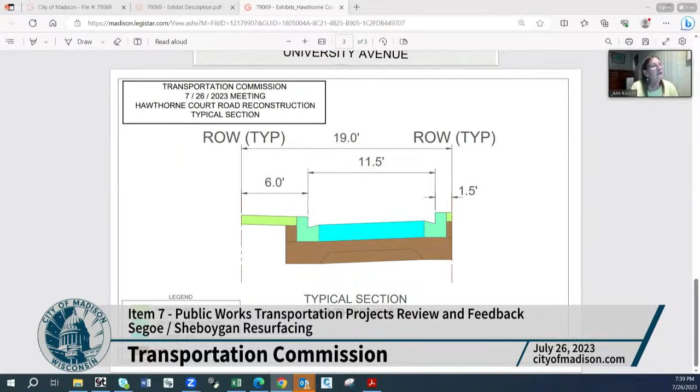Okay, thanks. So we're going to switch from Fadi, who can stop sharing his screen please. Mario, are you going to do the next one? See my screen? Apologies, no Fadi, you need to stop sharing your screen. I'm looking, where is it? Thank you, no, okay thank you. I'm no expert on that stuff. Okay, there we go. Perfect, can everyone see my screen? You can, can you make it full screen? Yes, if it's a slideshow can you make it full? Thank you, perfect, yes, here we go.

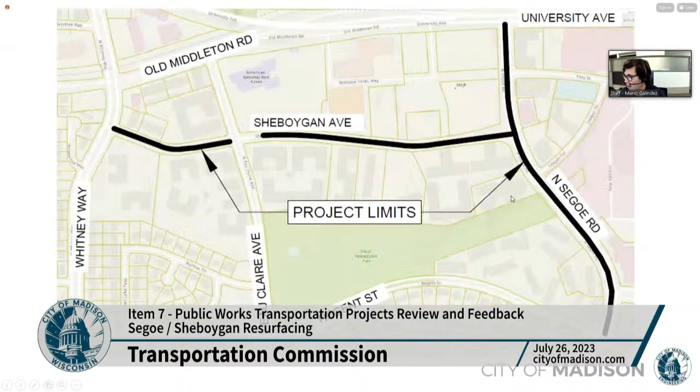My name is Mario Galindez, I'm a staff engineer at City Engineering. We are doing a project on Sheboygan Avenue and Segoe Road between Whitney Way, Segoe, University to Regent, on the west side of the city. This is a resurfacing project with utilities, so we're doing some utility work, but keeping the curbs in the same place as much as possible, really just replacing the roadway and making improvements within those constraints.

One thing I'd like to highlight is we have a couple of BRT stations in the project limits, one at Eau Claire and Sheboygan and one at Sheboygan and Segoe. Both stations will be constructed before the project begins, so we'll have to work within those limits. We've looked at their plans and coordinated with ours. There are some spots where they will need to update their plans as new things come to light as we continue with this project.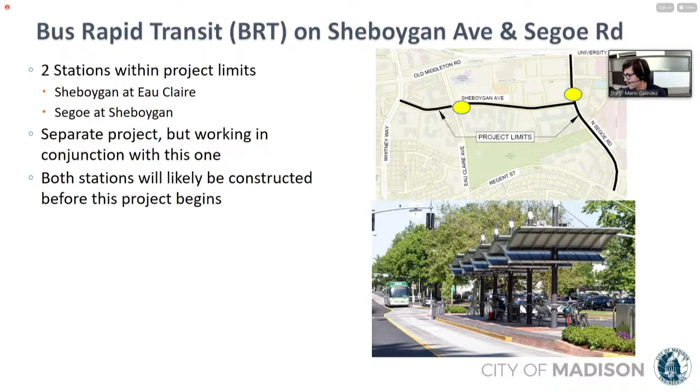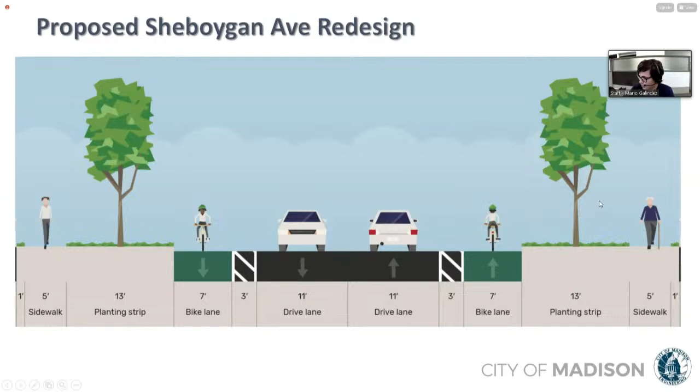For Sheboygan Avenue, we are keeping the curbs in the same place. For the layout of the street, we wanted to provide a facility for bikes while keeping the large trees on this block, keeping the curb in the same place as mentioned before. So we have buffered bike lanes and drive lanes of about 11 feet to accommodate the BRT buses going down the street. Our priorities here are transit priority with the BRT system and the tree canopy, since these are large, mature trees.

Currently we have trees, bus stops, loading zones, and 2-hour parking in this flex zone. We're proposing to keep the trees, bus stops, and loading zones, and add bike lanes here. Notably, we do have permitted 2-hour parking on this street, so we will need approval from this commission before we remove that parking, which will happen probably at another meeting. But we are looking for input on these options and this design today.

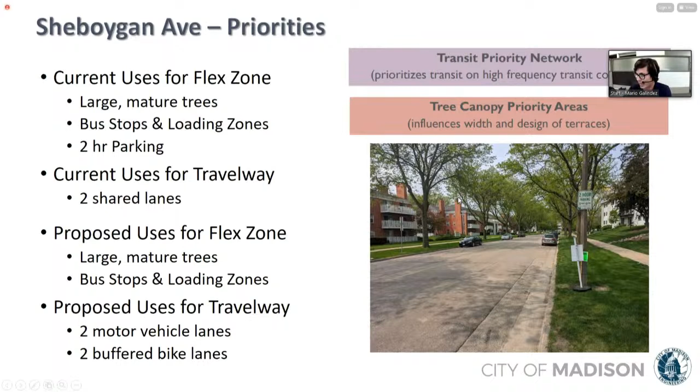I wanted to highlight the current existing loading zones on Sheboygan Avenue that are written into the code. Because there are residents in these apartment buildings who need a place for paratransit and other reasons to get dropped off and picked up here on Sheboygan, we wanted to keep these loading zones in place.

It will be dashed out, marked, signs will be put up, and cars will be able to pull in and out. We also need similar loading zones for metro buses, because this BRT station needs to be a transfer point since some lines cannot run all the way into downtown. Some buses will need to stop here so people can offload and get onto the BRT buses, which is something we had to accommodate with this design.

Unfortunately, our width is only 42 feet here, so we have limited width to work with, and this is a compromise we've come up with. For this building, we are going to be moving their loading zone down the street to accommodate the bus loading zone.

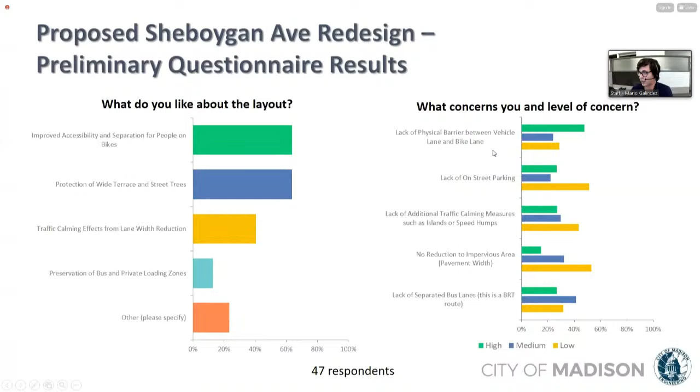We did a questionnaire on this layout, and I think the biggest concern we found was that people didn't like that it's a painted bike lane, so there's a lack of physical barrier between vehicles and bike lanes. This is something we'd like your input on, whether we want a buffer, median, or other option here.

Let's move on to Segoe Road. Segoe is quite a bit wider - I think we've got 32 feet on each side, separated by a 26-foot median, so it's quite large.

This north end of Segoe has been previously decided with the BRT project. We've extended some of it and added some things, but this layout with the bike lane crossing over and going straight through is from them, as is the sharrow on the right turn and the bus-only right turn lane for BRT buses coming out of the station at Segoe and Sheboygan. Notably, the median and bike lane buffer is a little smaller up here, just because the roadway is narrower at this Frey intersection.

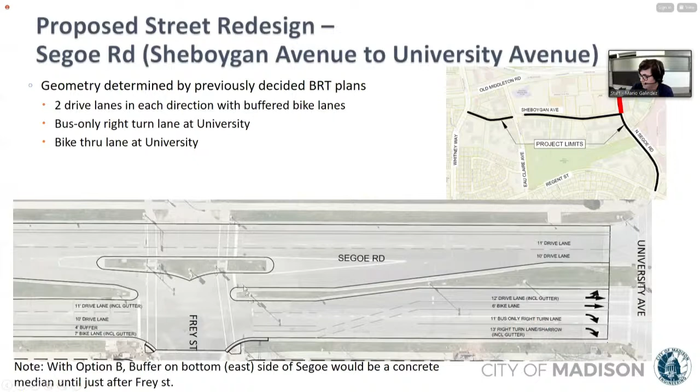For the rest of Segoe, it's part of the All Ages and Abilities Bike Network. We really wanted to improve pedestrian crossings in this area, especially since the road is so wide. We wanted to improve crossing locations, give bicycles a comfortable facility, make sure we're narrowing crossings, reduce from 2 lanes to 1 in each direction, reduce speeds, and make sure this road is accessible to everyone.

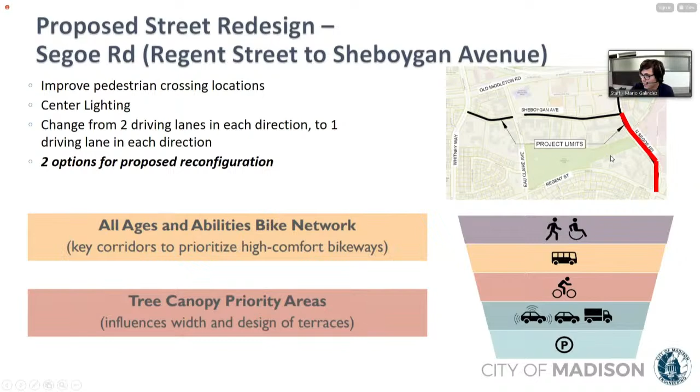We have 2 options that we've developed. This option is a continuation of what's further south in this project, a lower density residential area, implemented a few years back. We have a parking lane and a double buffered bike lane to protect against car doors as well as drivers. This is all painted, so it would be the parking lane, buffered bike lane, and then drive lane, keeping the curbs in the same place.

We would have bump outs at intersections. Right here at Sawyer Terrace, we would bump out to the bike lane so bikes could stop and pass through the intersection, and cars could as well, but we'd still have shorter crossings, which would be good for pedestrians. At these intersections we also have lighting and signaling we'll talk about as a separate issue - that's one of the things we want advice or input on.

Option B has a parking protected bike lane with a 4-foot median, really giving separation for bikes from cars, getting to that all ages and abilities score we want for bikes. Since this design is more complex, I wanted to give a broader overview of what's going on throughout the whole street.

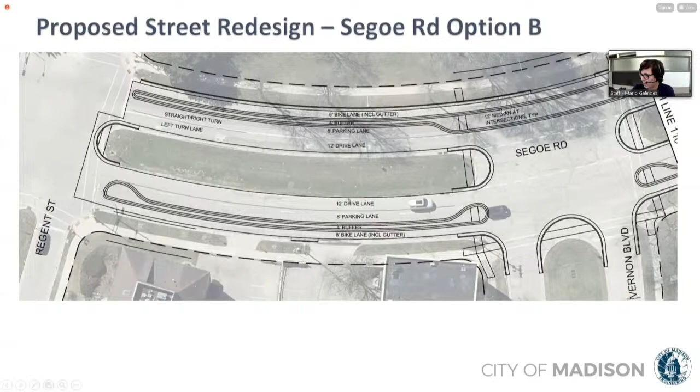At intersections we've got 12-foot medians. There was a comment about how bikes would have trouble turning left onto Vernon. At Vernon, we think it would make sense to put a curb cut here and have a place for bikes to come through, since this is not going to be a signalized intersection.

Moving through Heathercrest, we only have a crossing on one side because this crossing kind of goes nowhere. There's a retaining wall here, so nobody's walking here. It gets really narrow over here, so you can't walk. And over here there's really nothing. The main pathway from the apartment complex comes in here, so we thought it made sense to only have the crossing on this side.

At Sawyer Terrace, we did get the same comment about turning left for bikes, and there's also a park path that comes out here.

If we go with option B, we'll put a ramp here so bicyclists coming out of the park can get onto this bike lane. We'll also want to expand this sidewalk to 8 feet to accommodate those left turning movements, as well as any bikers who want to come to the other bike lane across the street.

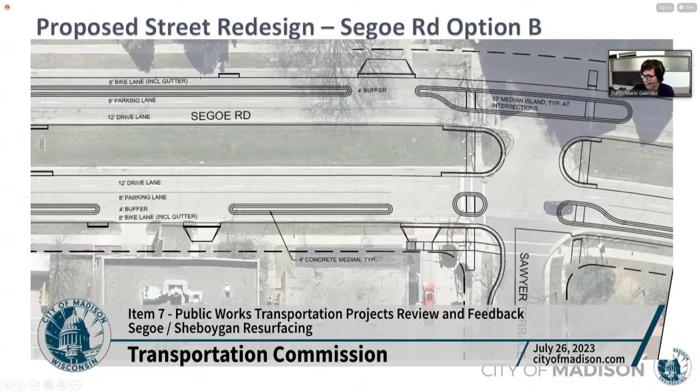That's the one thing that happened since I sent this presentation and we got that feedback, so I wanted to make sure it was included.

At Segoe and Sheboygan, we've got the BRT infrastructure here. Important to note that it is offset. This BRT project was designed before this curb was pulled back, and the aerial was also taken before then. So currently the curb is back here. That is one thing they still need to revise, and once we have their revision, we'll incorporate it into our plans. But for now, this will have to do.

We're using this configuration, pulling drivers who are moving through the intersection away from the BRT buses stopped here, with a turn lane. This layout with the bus-only right turn lane and drive lane is also determined by BRT, and there will be a light at this intersection to help the BRT move through efficiently.

When we were on site, I wanted to include this. I think it's important for us to acknowledge that these designs affect real people. This is at Heather Crest, leading into Hilldale, the shopping center, and some adults had to literally go into the street and put their hands up and stop traffic in order for it to be safe for children to cross, which is not ideal. So we'd like to ameliorate that situation if we can.

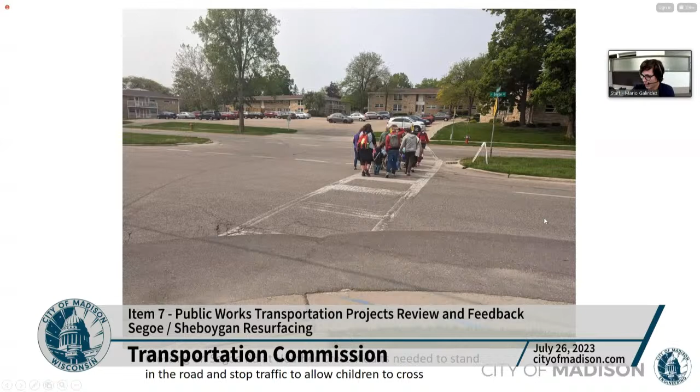We sent a questionnaire about this one as well, and support was pretty clear in favor of option B, and that's the one we probably recommend as well.

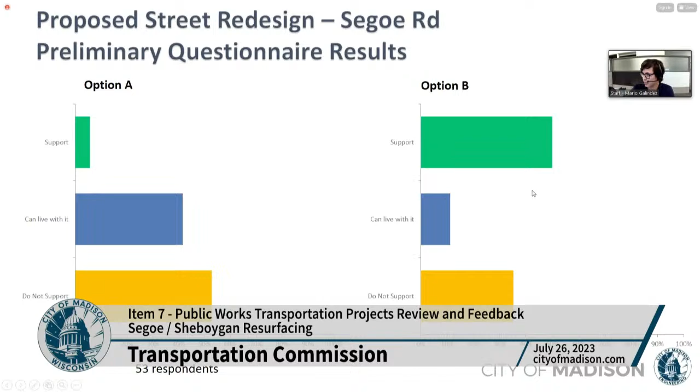In terms of moving forward, I didn't want to stop sharing my screen. We do have some questions to kind of focus the presentation or your response to all this, because I know it's a lot.

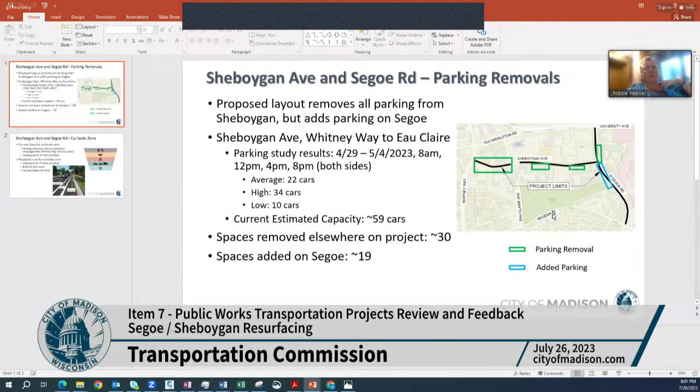I didn't want to sidetrack the conversation, but since we were talking about Sheboygan, I wanted to find out. And yes, I know there's structured parking because I've been watching the big ramp being built every time I go to Hilldale to get my groceries.

There was a significant conversation about buffered bike lanes versus parking, and it sounds like it'll be coming back to us again, Mario, for the actual decision with regard to the parking. So an important topic, Robbie, and one we'll likely hear more about.

Go ahead, Mario. So the question is about Sheboygan Avenue: are the loading zones appropriate? We have loading zones in the bike lane area. They'll be clearly marked, and bikes will be able to go into the buffer, but the buffer's only 4 feet, so they might have to go into the traffic lane a little bit to pass the loading zones. There'll be 10-minute loading zones, but bus loading zones could have buses sitting there longer than that, perhaps. We don't really know.

Would you like to see the bike lanes median protected? Similar to what we were doing for option B on Segoe, in the surveys they seemed to gravitate towards that a little bit, providing more protection. There would be a lot of gaps for driveways and loading zones, but we could consider that option. I did want to highlight that this option is contingent on the removal of the RP3 parking zones. Otherwise, we couldn't keep the bike lanes continuous through the whole street.

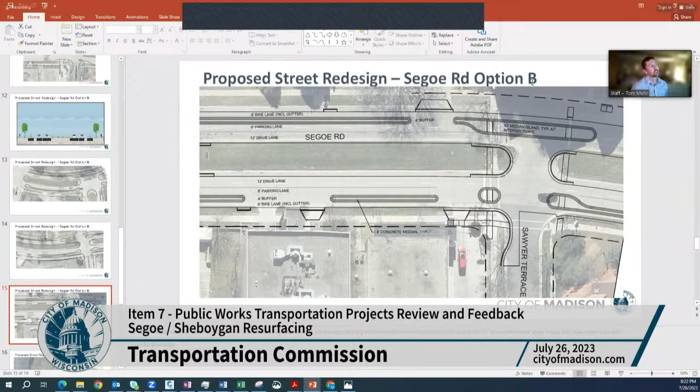So the question is, what do we do with this now that we're reconstructing it? Obviously there weren't RRFBs in 1979. Part of the discussion was the different assisted living resident buildings on either side of Segoe Road, and helping those residents cross. So the question is, is it better to use the signalized intersection? If we do that with the reconstruction, we're probably going to have to update things to make it work, we're not going to be able to just rely on the existing infrastructure. If we went to an RRFB, it would mean taking out the existing signalized intersection and installing an RRFB. Jerry has the details of that, but that's the main question here.

Sure, I think the discussion will probably focus on what's safer, right? Darren, go ahead. Yeah, I'd jump right away to what's safer, and my experience says keeping the signalized intersection. Drivers ignore the RRFBs, I've seen it happen, I've had it happen in front of me, but they tend to really pay attention to a traffic light. So just for pedestrian safety, I would say keep the light.

Okay, other comments with regard to that? We're okay. Denise, go ahead.

Thanks, Ann. Yeah, I would really, particularly in this area where there are a lot of elders and people with disabilities, people that just need longer time to cross, and also who may really struggle to know, is that car really going to stop at the flashing beacon or is it not? So I think it would be hard for folks who are used to that signalized intersection to see it go away. So yeah, I would lean towards keeping it signalized.

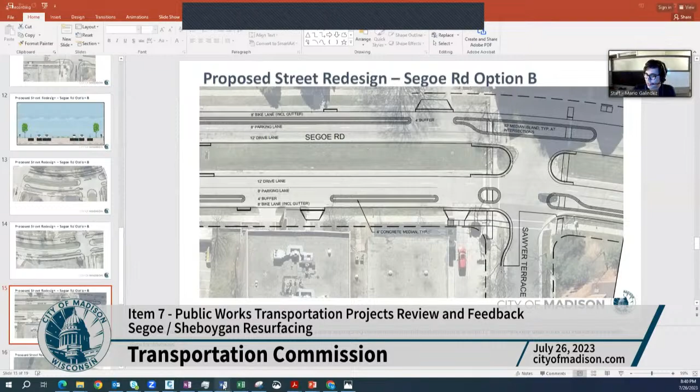Okay, so it sounds like people still believe we should leave the traffic signal there. Any other questions, Mario? I think that about covers it. Thanks for everyone for staying late. No, that's okay, it's very important for us to talk about. Renee, go ahead.

I just wanted to mention the RP3 parking that will be removed on Sheboygan. The reason we need to come back is that's in an ordinance that requires a public hearing. Stephanie and I talked, it made sense to decide that we're going to move forward, that there was support for that design that removes the parking. Then we would need to come back to meet the way the current ordinance is written to do the RP3. So that would need to go onto the agenda so we could go through the steps outlined in the ordinance. When would that be, Renee, do you think?

Stephanie and I had chatted that maybe we would just do it in two weeks. So the August 9th meeting? I think tentatively we could just talk over the steps and make sure that works in the schedule, but that's the ordinance requirement.

Remind me, is that on Sheboygan? That would be on Sheboygan, which has the RP3 parking currently that would be removed. And I believe there is one area on Segoe as well. So be careful, Renee, make sure you get all the zones. It's all area zone 20, but there might be a small portion that's changed as well on Segoe, but primarily Sheboygan.